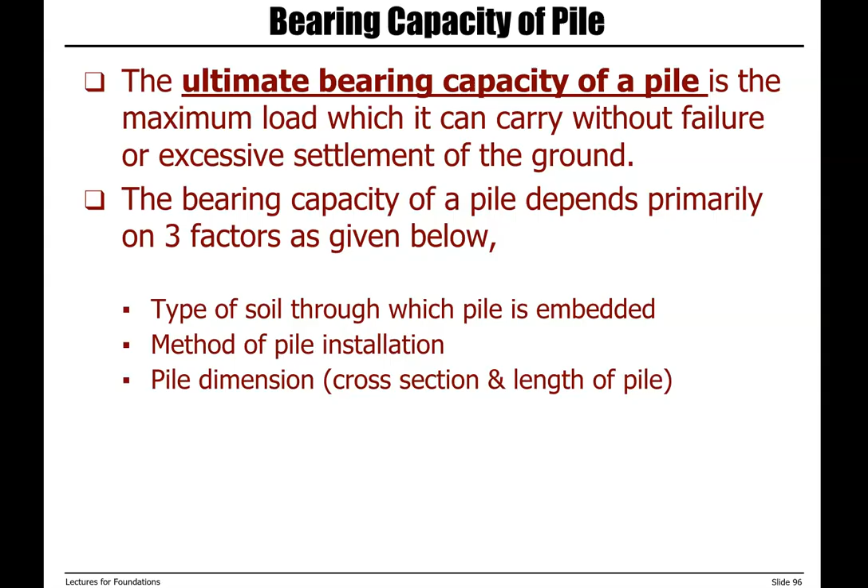When we look at a pile, there are two sources of support. One is the support coming from the end point, the soil beneath the pile. The second type of support comes from the friction between the pile and the soil surrounding it, which we call skin friction force. Again, this friction comes from between the pile and the surrounding soil, and then we have the support coming from the end point, which we call end or point force.

The ultimate bearing capacity, or the ultimate bearing load, is when we add the endpoint force and the skin friction force together.

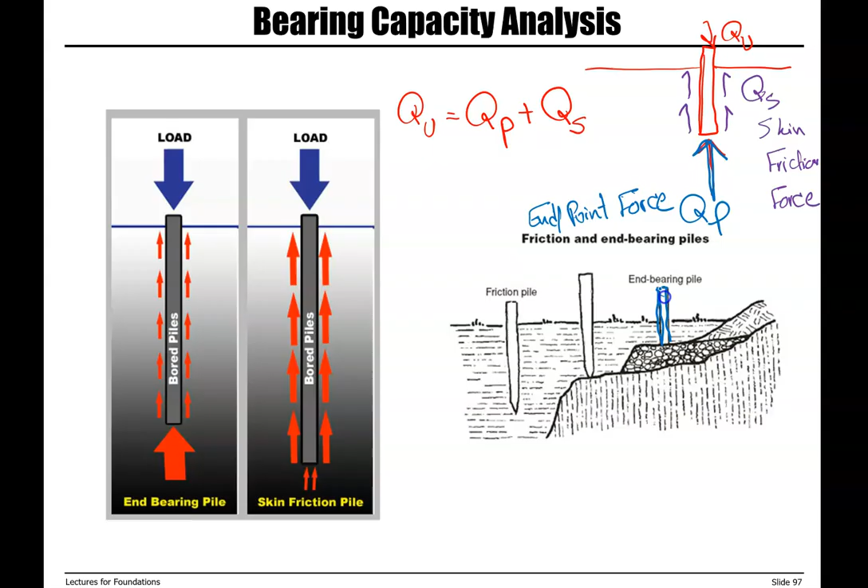We can also have different types of piles. If we have a pile sitting on strong soil with high capacity and high strength, for example sitting on bedrock, we have a larger force at the end point compared to the friction. The depth of the pile is really small, so we have a small skin friction but a much larger endpoint force. In this case, endpoint force is larger than skin friction force, and we call these types of piles end-bearing piles.

Then we also have piles with a higher length, where the soil beneath the pile is weak, so we have a small endpoint force. In this case, QS, or skin friction force, is larger than endpoint force. These types of piles are called friction piles.

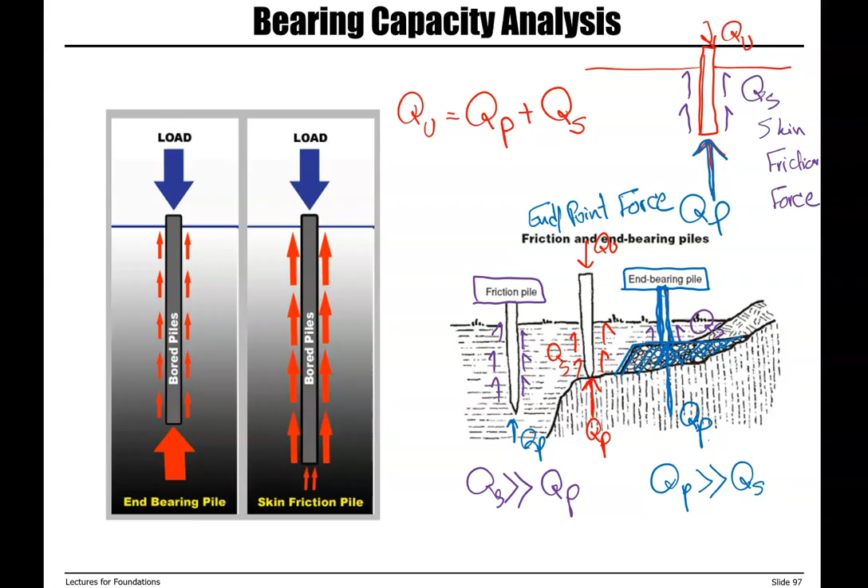But in general, QU is when we add end or point force to friction force. So again, the ultimate bearing load, QU, the ultimate vertical bearing force, is equal to QS, the ultimate skin friction force, plus QP, the point or end force. So ultimate bearing capacity is when we add the end force and the skin friction force together.

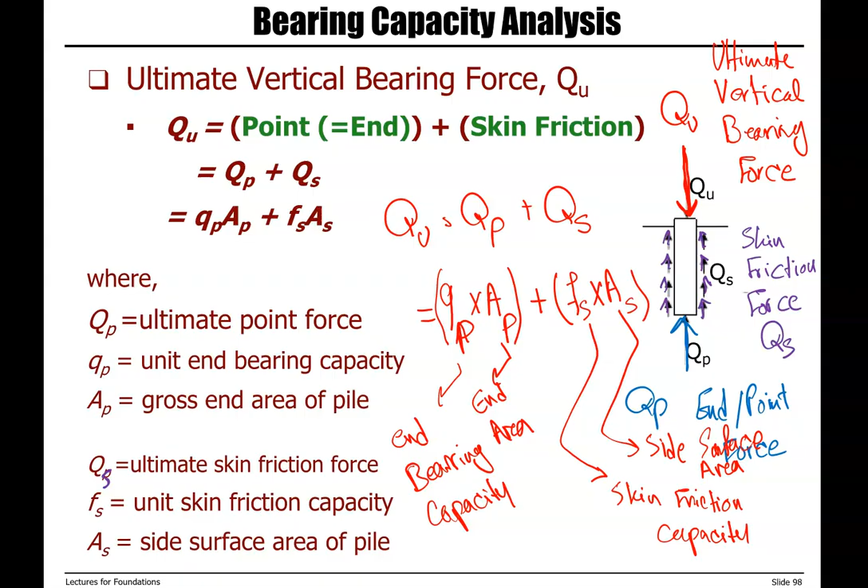So when we have a pile, in this lecture we will look at a cylindrical pile or a square pile. This is the length of the pile, and then we have the width of the pile, or pile diameter, or radius r.

When we talk about end area, this is the end area, or AP. It is pi r squared if we have a cylindrical pile, or b squared if we have a square pile. Here we have a square, and here we have a circle with radius r. So end area for a cylindrical pile is pi r squared, and it's b squared for a square pile.

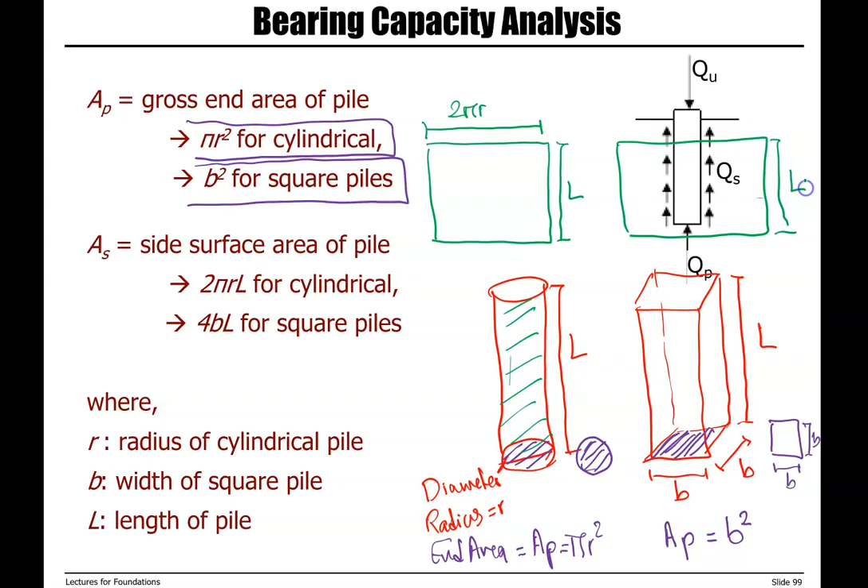Then side area is the side surface of the pile. If you open your cylindrical or square pile along the length, you get a rectangle with a length of L, and the other side is equal to the circumference of the circle, which is 2 pi r. Or for the square, if we open it along the length of the pile, we have L on this side and the circumference of the square, which is 4b.

So this is the side surface area. For a cylindrical pile, As is 2 pi r times L. For a square pile, As is 4B times L. So again, for a cylindrical pile, AS is 2 pi r L, and for a square pile, AS is 4B L.

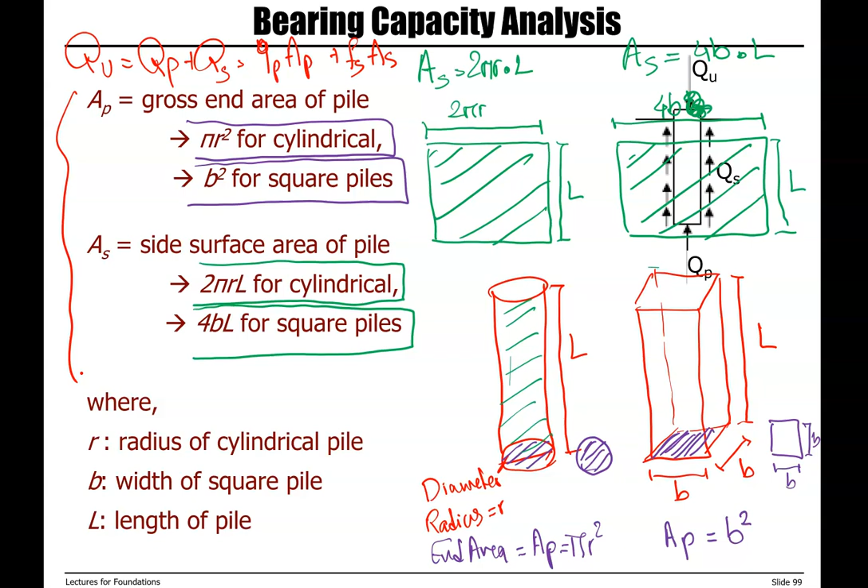We need to calculate ultimate bearing force, which is equal to QP plus QS, that's QPAP plus FSAS. We have the formulas to calculate point capacity and skin friction capacity for driven piles in sand, provided in NCHRP report 393. End bearing capacity is equal to 1000 times the square root of N value or NBPF, the number of blow counts for the SPT data, giving you QP in kilopascal.

For skin friction capacity or FS, you can use this formula, again for driven piles in sand. Fs in kilopascal is equal to 5 times N value to the power of 0.7. You can calculate Qu as Qp plus Qs, which is QPAP plus FSAS. Then you calculate allowable bearing capacity by dividing ultimate bearing capacity by a factor of safety.

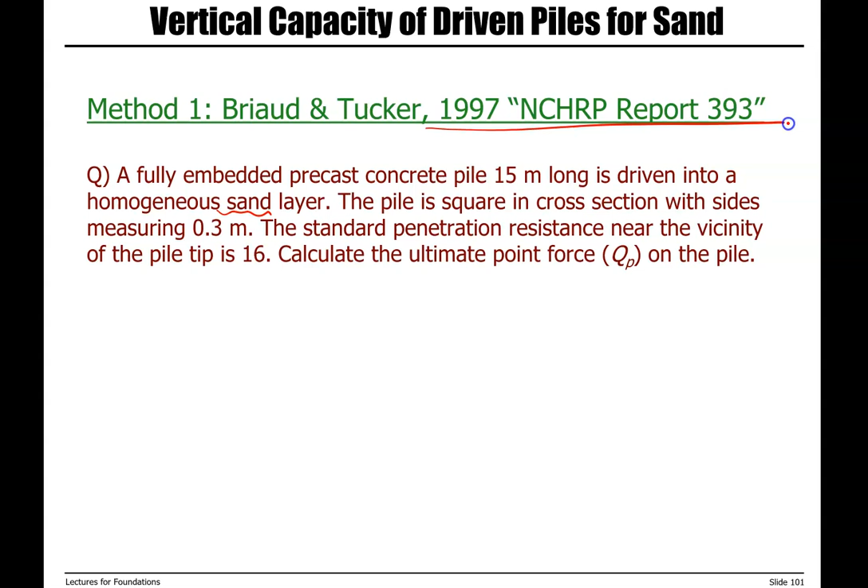We have a fully embedded precast concrete pile, 15 meters long, driven into homogeneous sand. Since it says sand, we can use formulas provided in this report. The pile is square in cross section, 15 meters long and 0.3 meters by 0.3 meters. The standard penetration resistance near the vicinity of the pile tip give an N value or N BPF of 16.

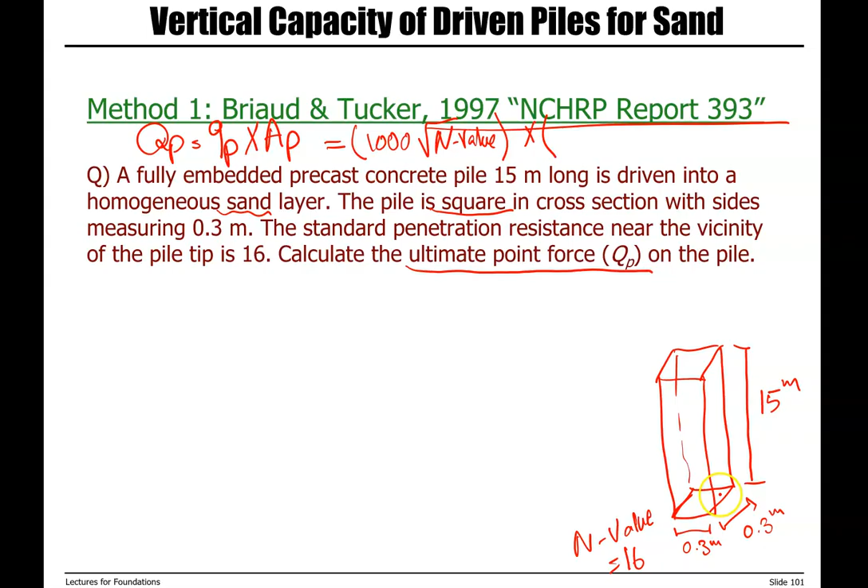Calculate the ultimate point force QP. QP is point capacity times end area. Point capacity is 1000 times the square root of N value. When we have a square pile, AP is B squared. The final answer for QP is equal to 360 kilonewton.

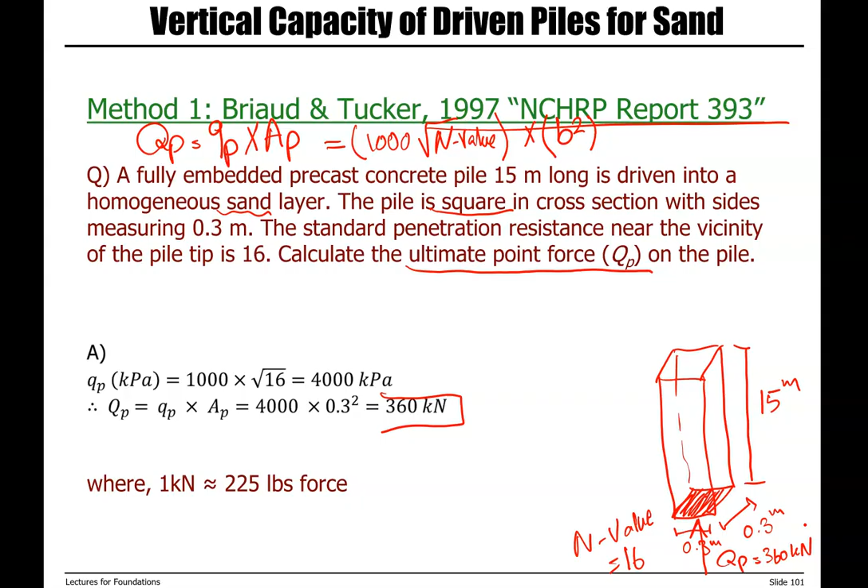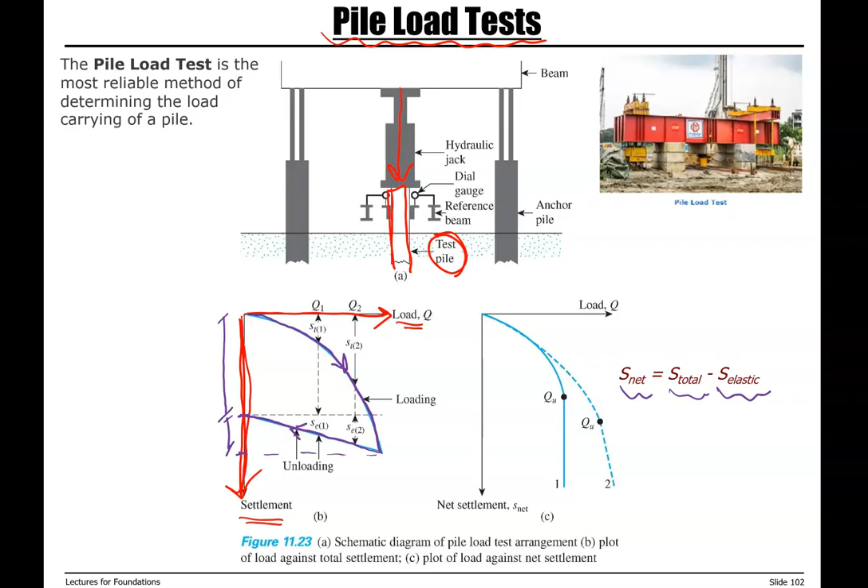We also have a pile load test, where we have a test pile. Using a hydraulic jack, load is applied, and we get load versus settlement. When load is applied, with an increase in load we observe an increase in settlement. When we remove the load, some of that settlement is recovered. So this is how much settlement is recovered, and this is our permanent or net settlement. The net settlement is total settlement minus elastic recovery. The pile load test is the most reliable method for determining the load carrying capacity of a pile.

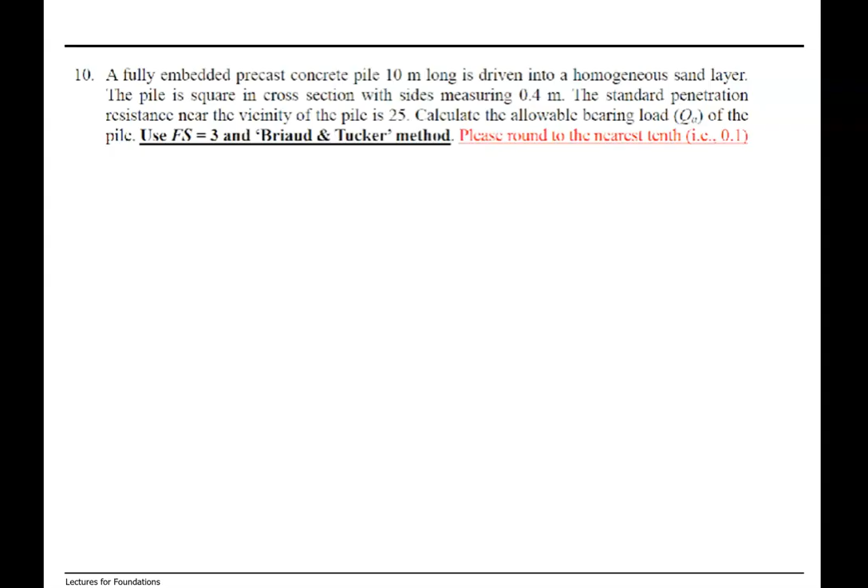A fully embedded precast concrete pile 10 meters long is driven into a homogeneous sand layer. The pile is square, 10 meters long and 0.4 meters by 0.4 meters. N value or SPT resistance is 25.

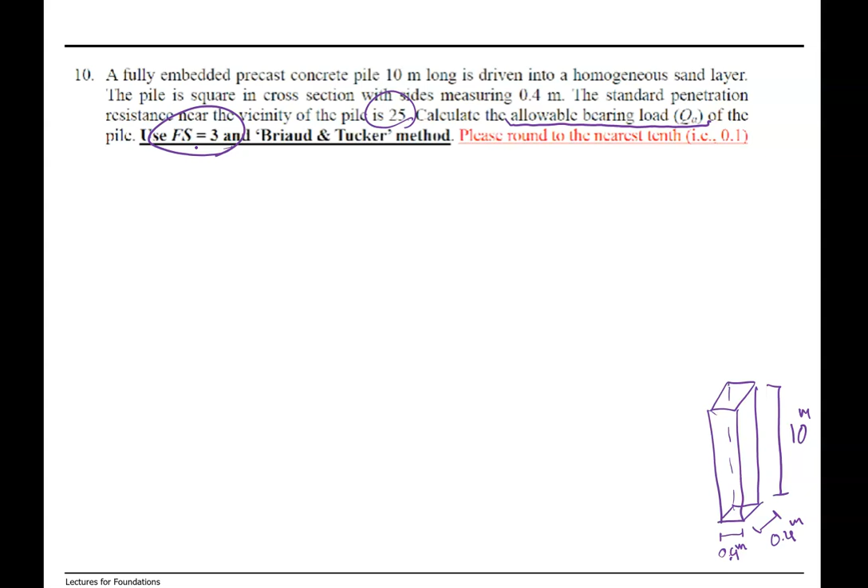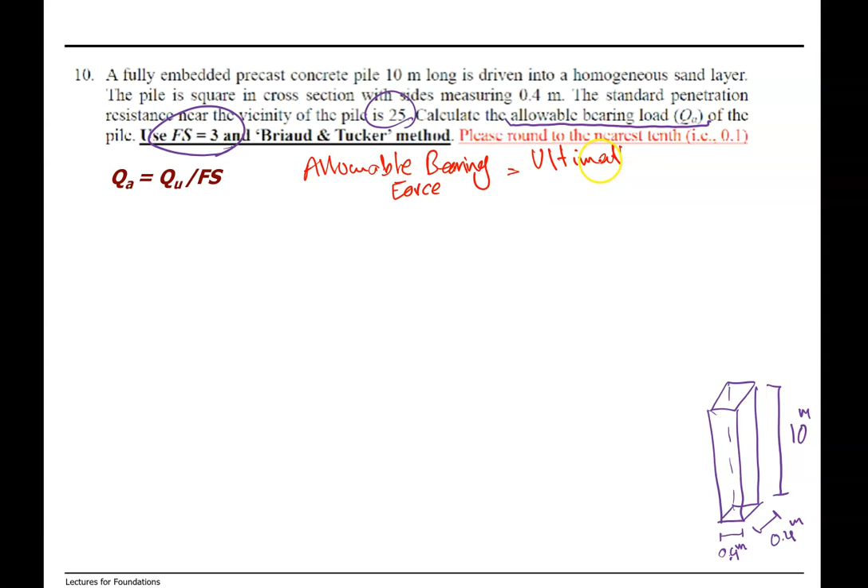The question is asking us to calculate allowable bearing load using a factor of safety of 3. Allowable bearing load or force is equal to ultimate bearing force divided by factor of safety.

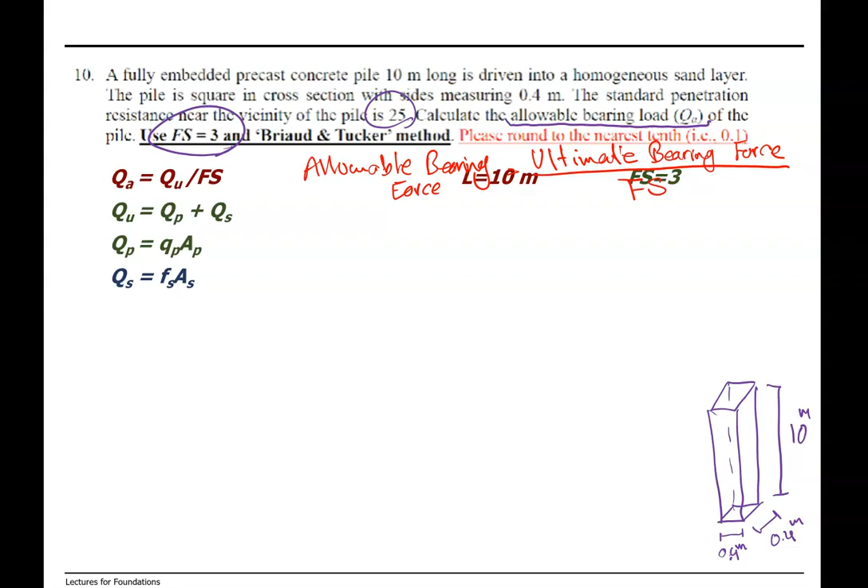Ultimate bearing force is equal to ultimate end or point force plus ultimate skin friction force. Endpoint force is equal to endpoint capacity times endpoint area. Skin friction force is equal to skin friction capacity times side surface area. So we have length of pile 10 meters, factor of safety 3, a square pile, SPT resistance 25, and width of the cross section 0.4 meters.

Since we have a square foundation, end area is B squared and side area is 4B times L. B squared is 0.16 meters squared. AS is 4BL, which is 4 times 0.4 meters.

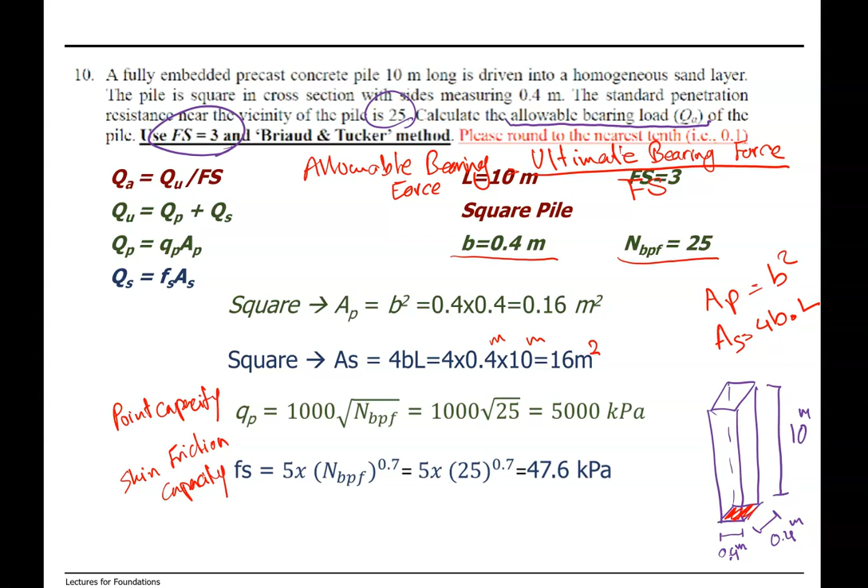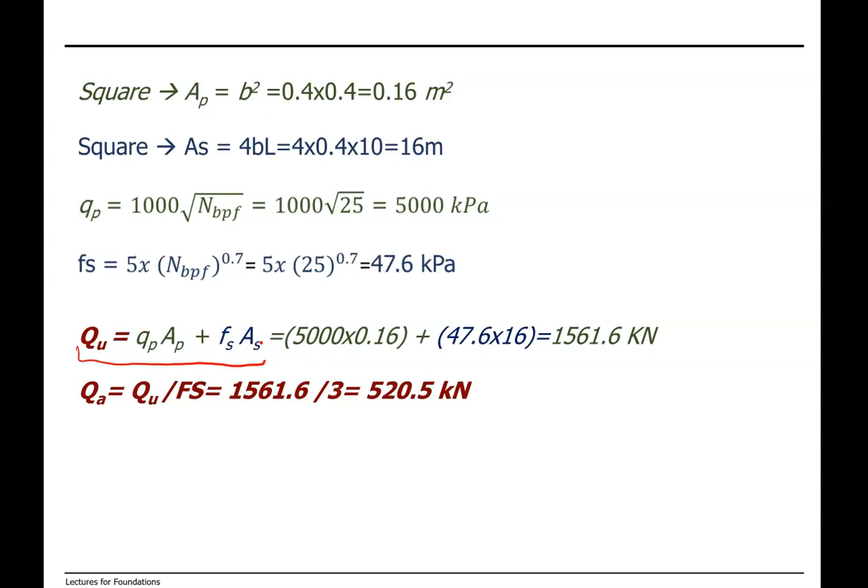We also have a driven pile in sand, so we're going to use these two formulas to calculate point capacity and skin friction capacity. 1000 times the square root of N value, or NBPF, or SPT resistance gives 5000 kilopascal. Skin friction capacity is 5 times N value to the power of 0.7. And QU, or ultimate bearing force, is equal to QPAP plus FSAS.

That's ultimate vertical bearing force, the maximum load that you can apply without failure. Then we get allowable bearing force by dividing ultimate by the factor of safety.

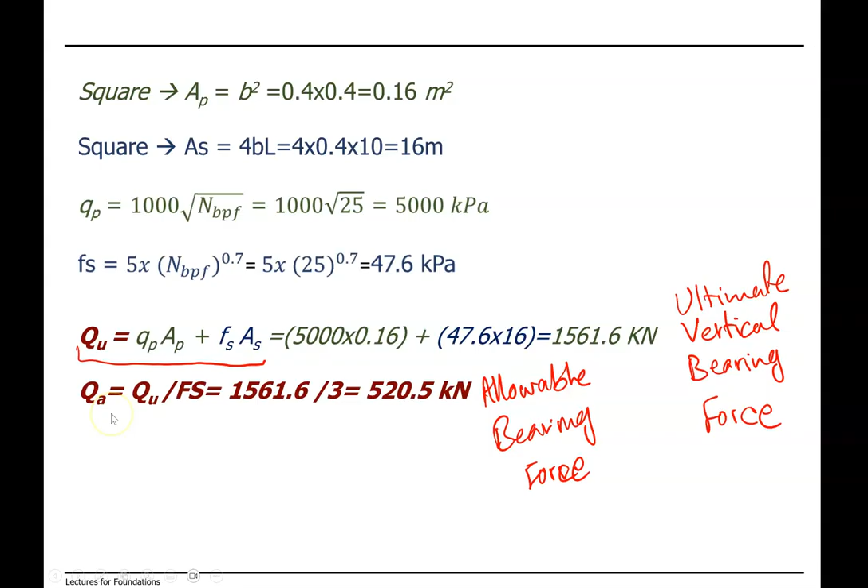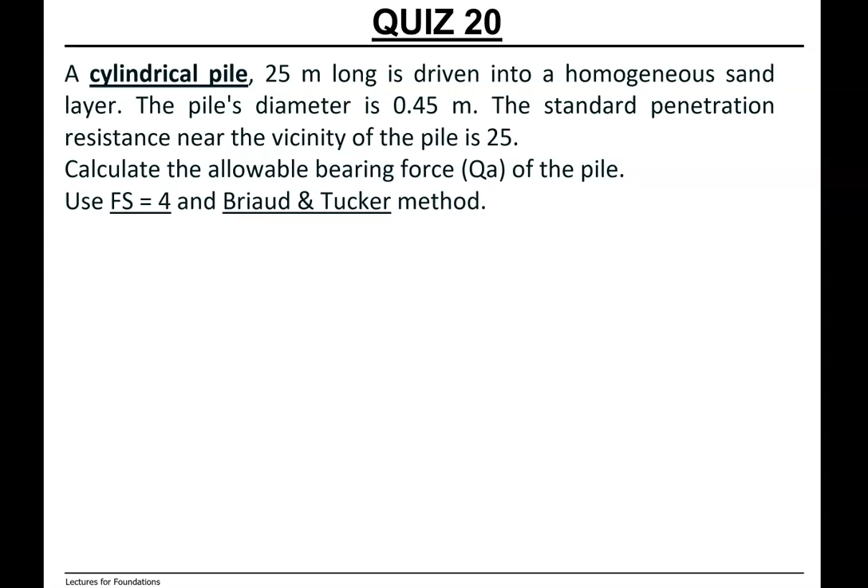So this is another example, and you can solve this problem by yourself just to practice.